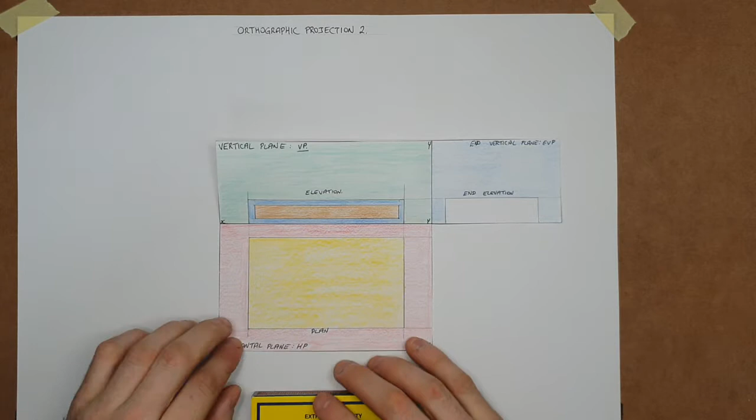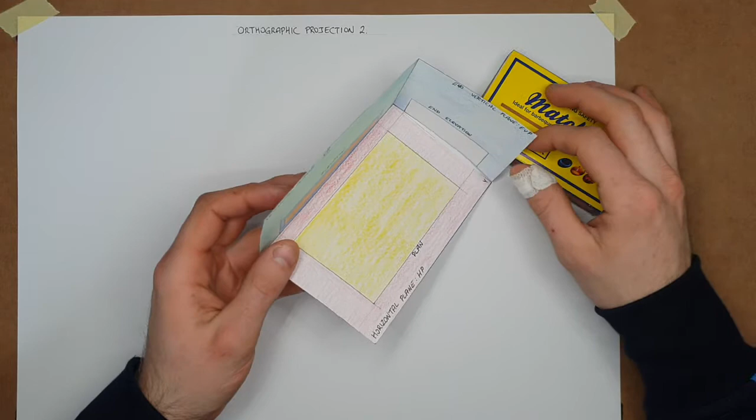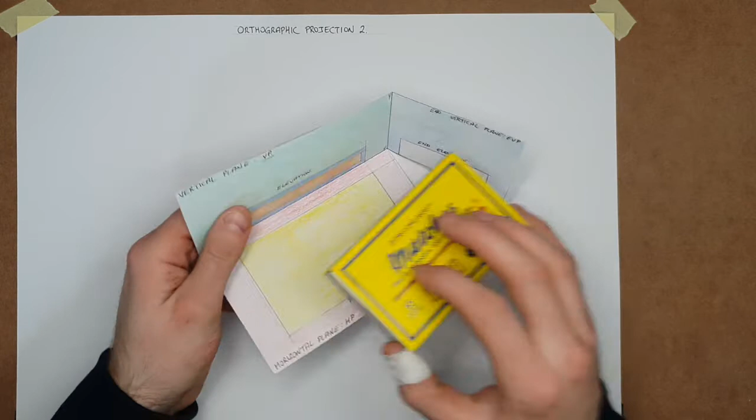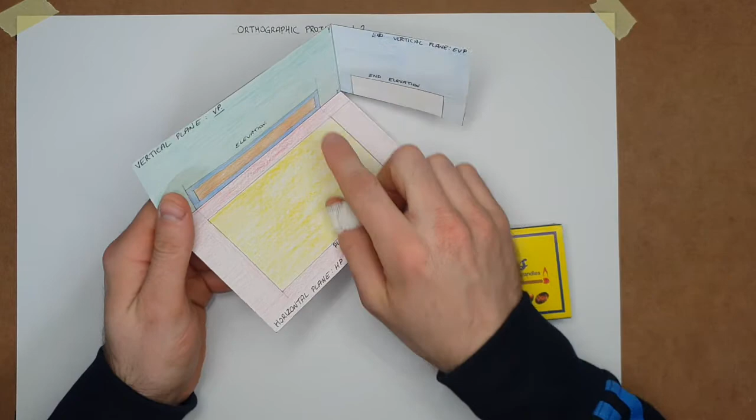Just in revision, when the object is put into the planes, if you look down from the top, the view goes in the bottom. Like with this object, when we looked in from the left, the view was pushed over through the object onto the vertical plane, ending up on the right. So that's the bit of understanding I need to bring forward: if you look down from the top, the view goes in the bottom; if you look in from the left, the view goes in the right; if you looked in from the right, the plane would be needed over on the left.

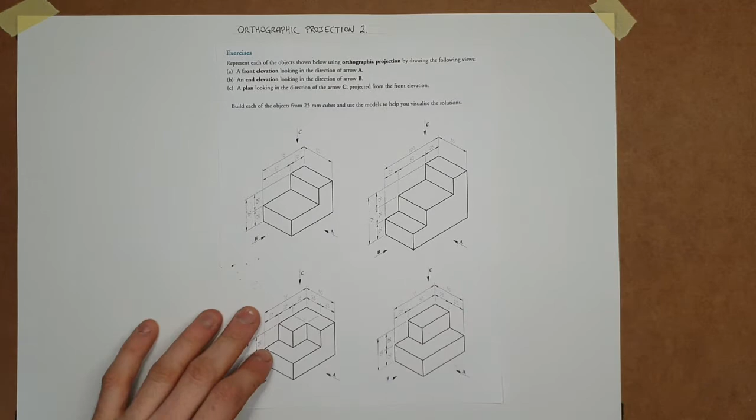We're going to take it on to some more difficult objects now, these ones in particular. Let me zoom in a little so we can see the specific drawing I'm going to do from this sheet - this one here. All the measurements are quite regular. We can see it's 25 and 50, total height and 75. This is an activity that can actually be built up with little bricks.

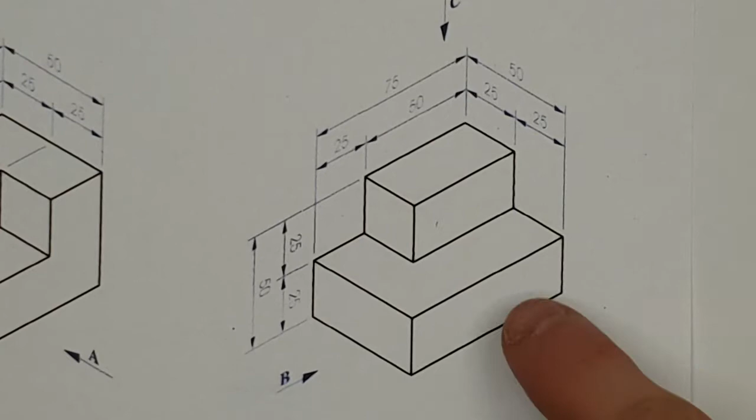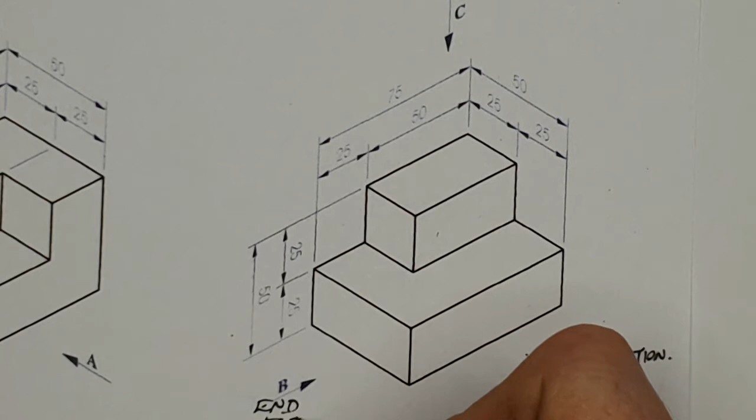What we're looking at is this: we're looking at an elevation A. I'll just take note of that - elevation A. We're looking for end elevation B, and we're looking for a plan C. So three views, all structured on the page.

This time we're not going to draw the three planes - we're not going to put in the vertical, horizontal and end vertical plane because there's no need. We're just going to structure our three views on the page. The best way to start is by adding a little bit of color. If we can visualize ourselves standing there, seeing this, and add color to what can be seen from each location, it makes it so much easier when we go ahead and start drawing after.

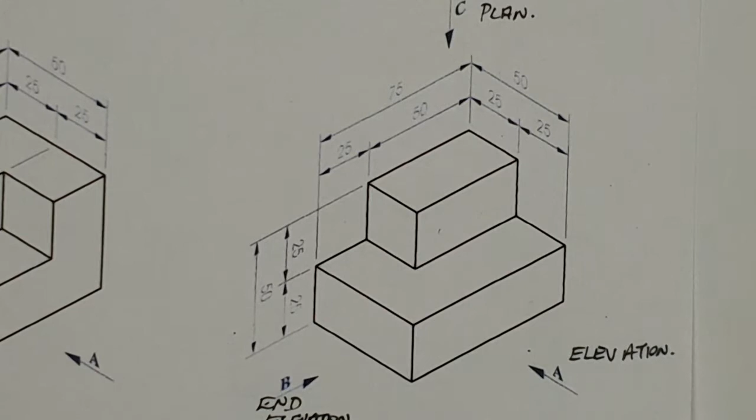I'll zoom out just a small bit, and first off I'm just going to draw a little person here in position A - this is their left hand and this is their right hand. It's very important that we can visualize exactly what's happening, what's on your left and what's on your right when viewing from a particular position.

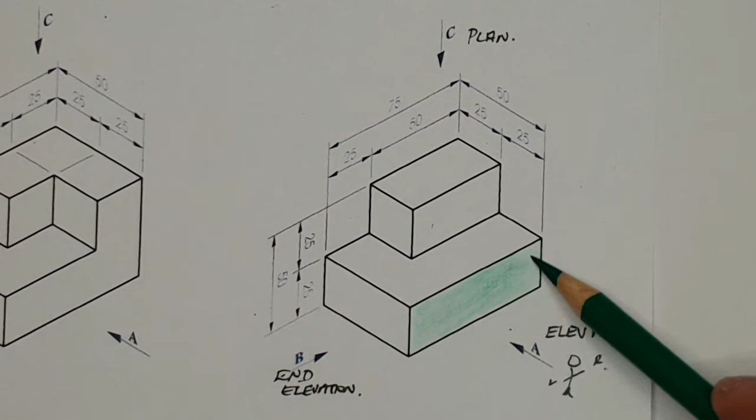As I view this object, the first thing I can see right here in front of me would be this vertical surface, and that vertical surface is 25 millimeters tall. It's the measurement given up to this whole surface, which includes that front. It's 25 tall, and the total length of it, making my way back to the back, the whole length of the object is 75. So 75 long, 25 tall.

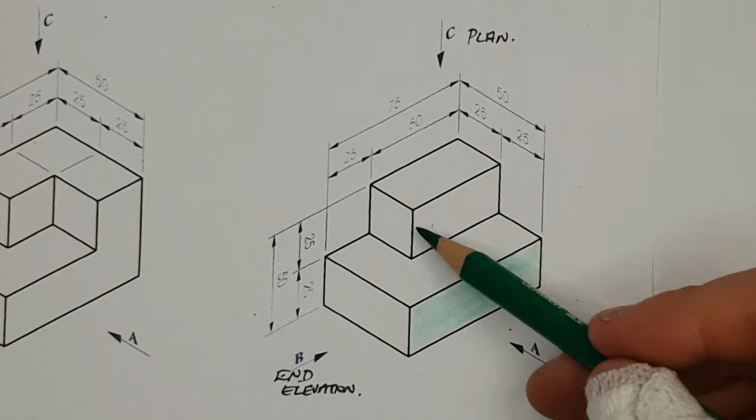What else can I see? I can't see this one - it's in line with my vision, so we can't see it. If I jump up to the top, I can see this one as well. So this one is what? I'll just work back here to figure out my measurements. It's 50 millimeters along this way. And how tall is it? The measurement isn't given out here - it's given over here as 25 again. So there's a bit of practice here in getting used to reading the measurements as well, and what they're pointed at.

Another important thing, though I'm sure everyone's used to seeing this by now. The measurement of 25 here is pointed out using dimension lines and arrows, with a leader line showing that the top of this measurement refers to the top surface, since it's all flat, and the bottom refers to this bottom surface. So the difference in height between the bottom and top surface is 25.

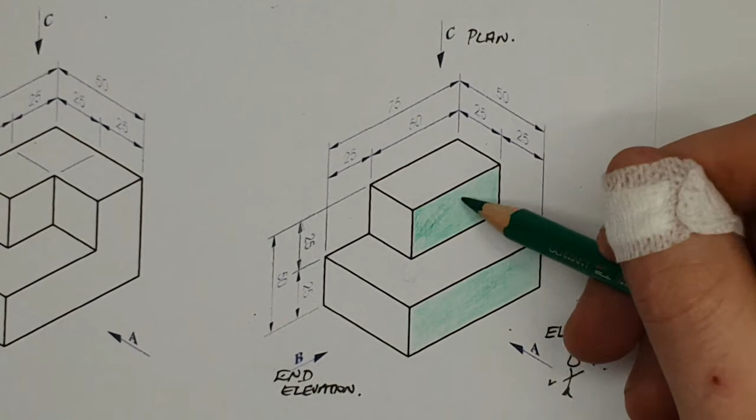From position A, standing here, on my left hand side I get this 75mm line, on my right hand side I get a 25, but I also get another 25 block standing on top. On my left hand side I have a free space here, so I need to think about that - I don't need to add any more colour. That's all I can see from position A.

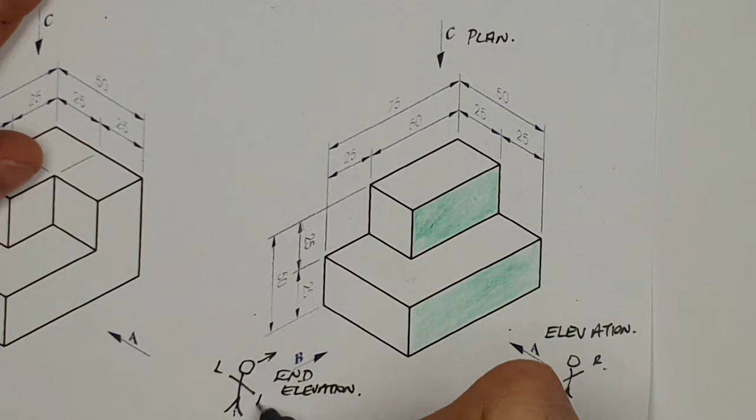If we move ourselves around, taking ourselves from A and walking around to this side, we stand here and look in at the object again. That's my left hand, that's my right hand. So to get the colours again, as I'm looking in, the first thing I can see is this surface here.

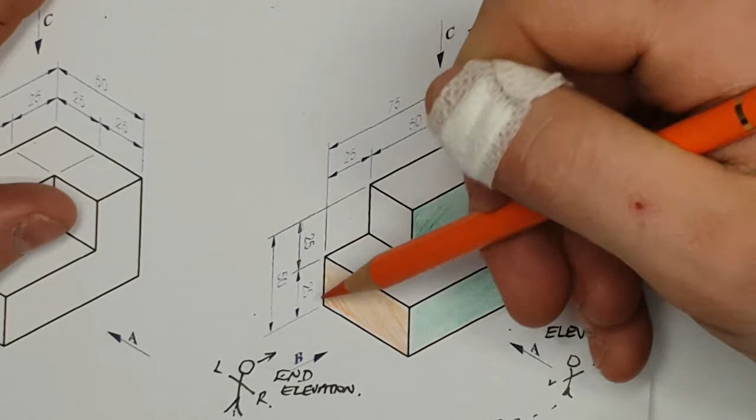Just so I can get familiar again with measurements, that surface is the same height as the green one at the start - both 25mm. Looking at the total length of the object, those are the lengths in green, and this is the widths here, and then we have heights - so lengths, widths, and heights.

The widths are all shown over here. Total width of the object is 50 - 25 for the top block, plus 25 extra, so total 50. What else can we see? Well, on the left hand side, up tall, up high, we can see an extra orange square, just like that. I think that's it - I can't see this flat surface or this flat surface because they are completely level.

So from position B, looking at an end elevation of the object, that's what I can see.

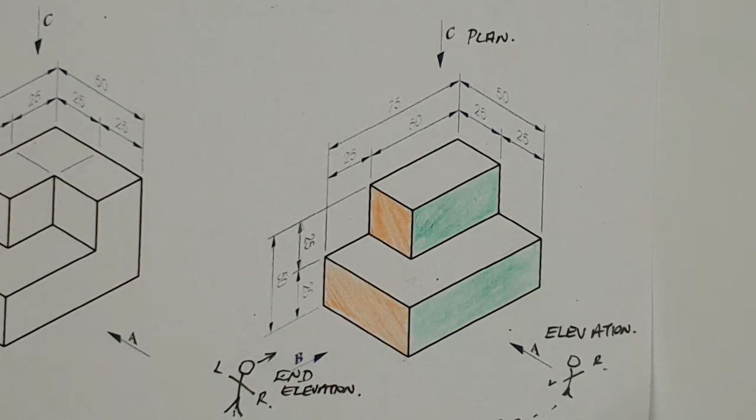On to the next one - this one takes a little more imagination. We're hopping into the helicopter, going up in the air, right up, and looking down on top of the object. So I'll just draw - there's my eye right there, looking down on top, in line with arrow C. So what can I see this time? We'll grab a different colour and add it in, and what we can see is just two surfaces.

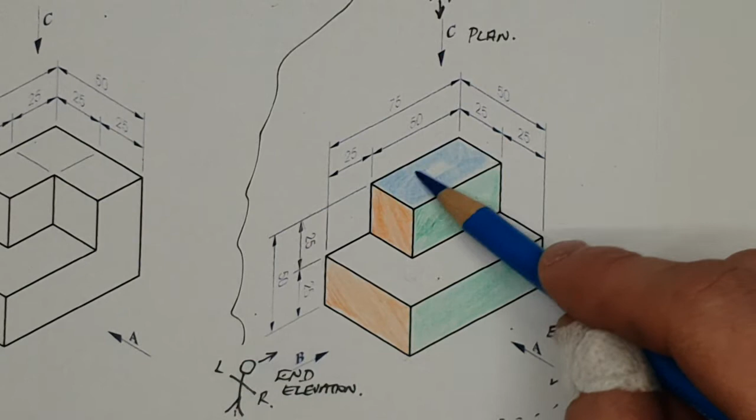I think this is often the easiest one to visualize - whatever is up at the top, like the roof of a building, is what we're looking for here. These flat surfaces up at the top - we have this guy right here, and this time the two dimensions we're seeing are the lengths and widths. We can't see heights when looking down on top at a plan. So we can see that blue surface there as well.

Now the collection and organisation of these three views together - the green view being the elevation, the orange view in from this side, the end elevation, and the blue view down on top being the plan - the collection of those three views is going to give us all the information we need for this three-dimensional object. Now, just fold that sheet in half and leave it to the side of my drawing board so it's still visible, and bring it right down to just that one question we're working on, and we'll start drawing.

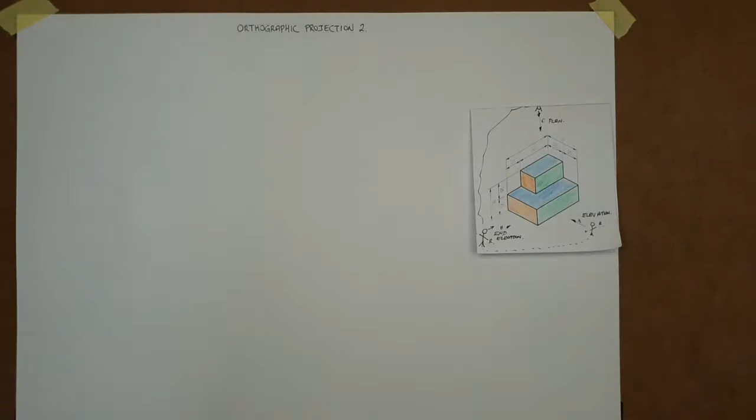First thing I want to make sure is that the drawing fits on my page. I'm going to start off here on the left hand side, and I'll zoom out a bit so that this is all visible. I want to make sure my three views, elevation A, end elevation B, and plan C, all fit on my page, and they will because it's quite a small drawing.

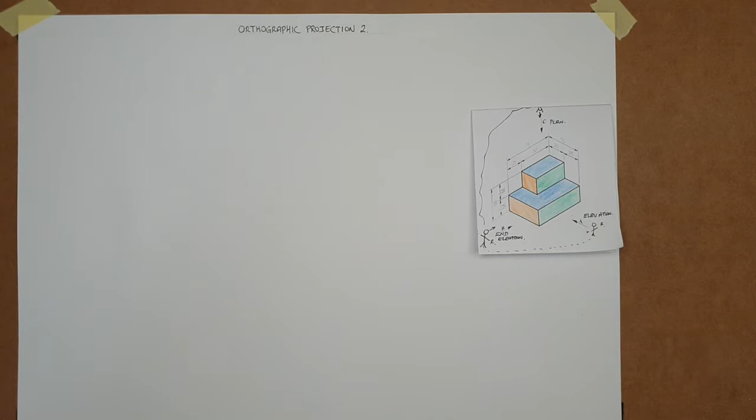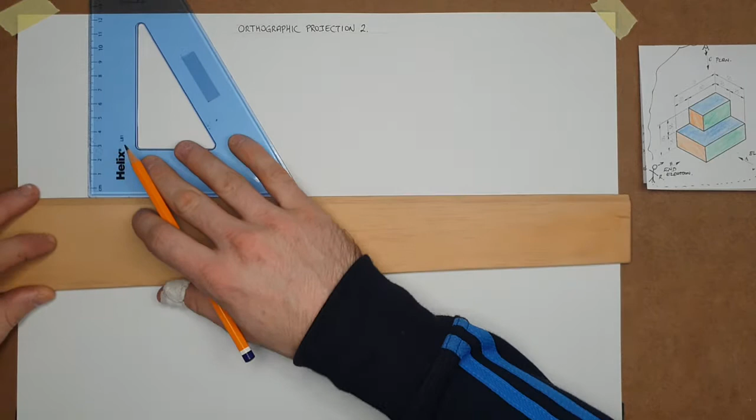Starting point for this drawing: from the top of the page I'm going to come down 80mm. I'm just going to move the page just off the board so my T-square doesn't get caught there. So from the top of my page I'm going to come down 80.

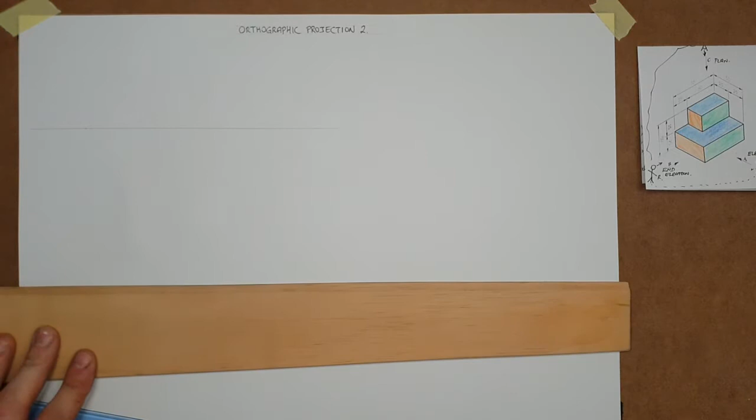And from the left hand side of my page I'm going to measure in 40. That's the start point of my drawing.

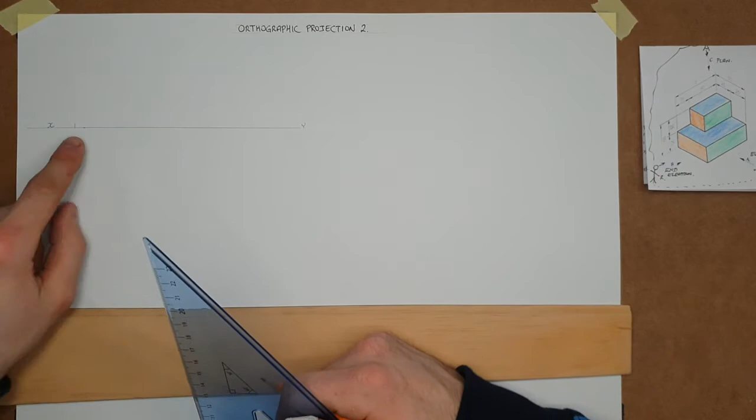The line I just drew, I'm going to try to make sure this stops maybe just about halfway in the page, so I might be able to fit a second drawing in. The line I just drew is the XY line, the line of intersection between the vertical and horizontal planes. The point I just marked, down 80 and in 40, is the starting point of my drawing.

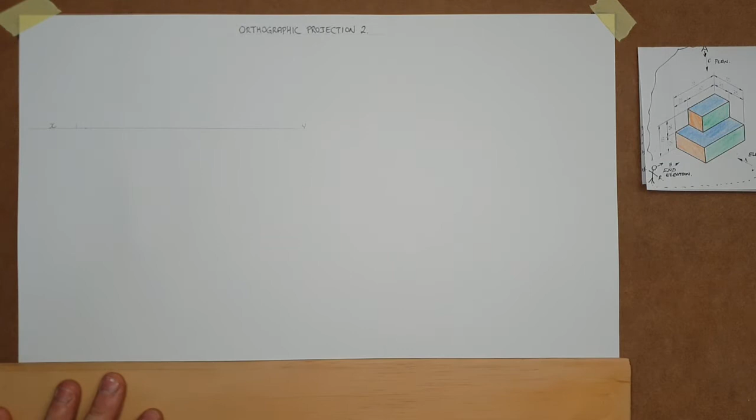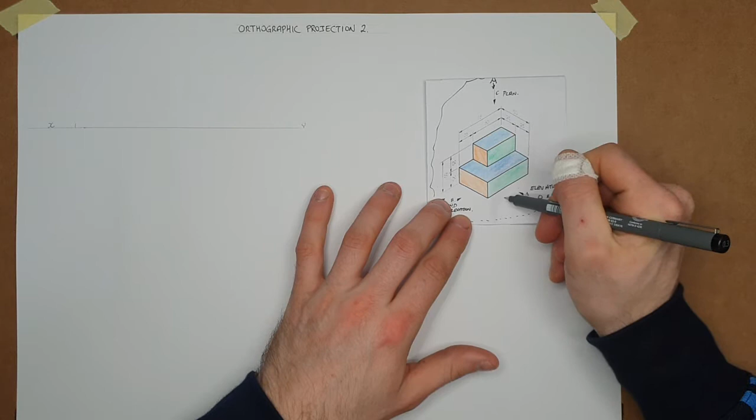It is the first point on the elevation. So where is that? Well, when I'm looking in at my elevation, on my left hand side, down the corner, I have this point right here. That is where I'm going to start. I'll start off by building this first green surface, which is 75 long and 25 high.

So that's where we'll get this question off to a start. I'm going to measure 75 along. I'm going to draw two light lines standing up, and that first surface, as I said, is 25 millimeters high. That's the top of the surface, the bottom of the surface, and the left and right side.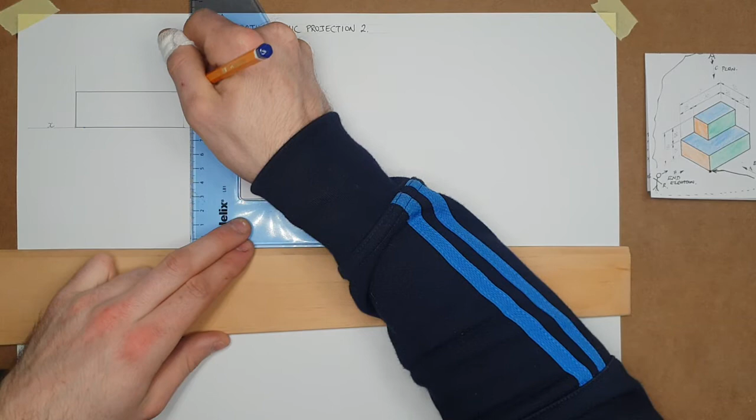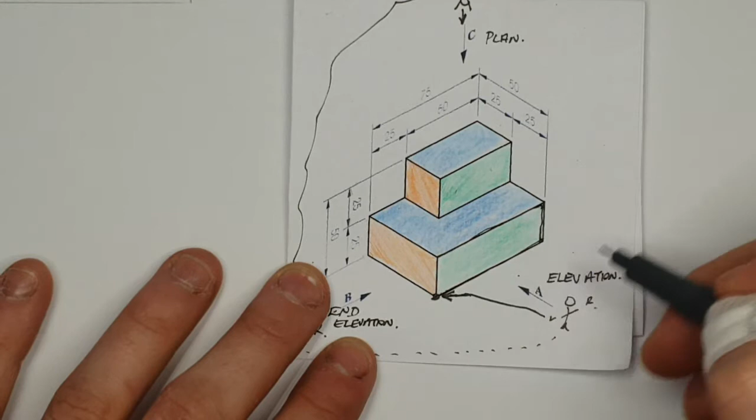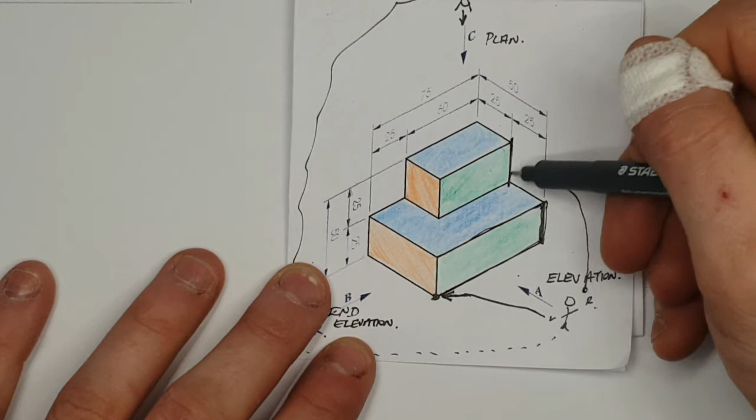Now, one surface done. To bring this back in, what we need to visualize this time is which side is the block. So I've drawn up, gone across, gone back down and across the base. On my right hand side, up top, I can see this block. Now, the interesting thing is that this line and this line are all part of that same back face of the object, the same surface, so they appear as one single straight line.

All of this detail right here is an extra 25 millimeters tall. So I'll build that surface up top again, and from 100 up to 125 is my 25 millimeters extra, and the length of that top surface was 50.

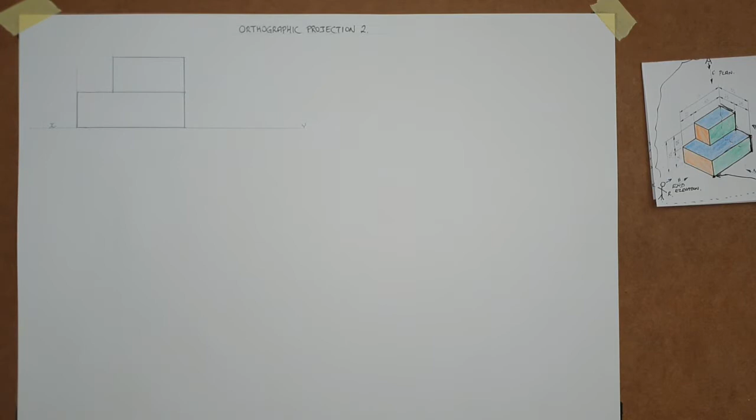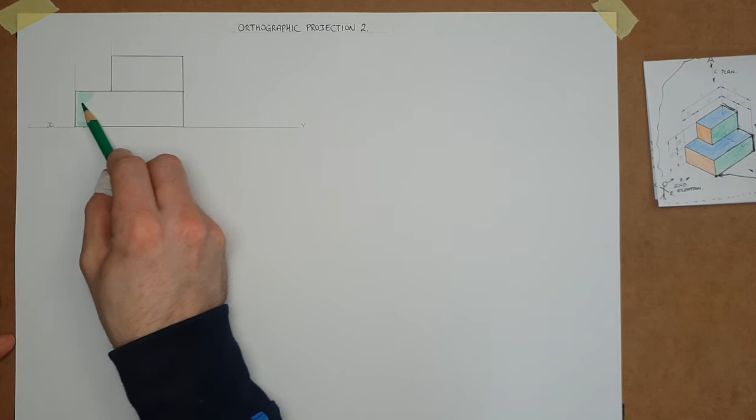Now, first view done, we can take a minute to add in a little bit of colour there as well. I'm just going to add a little bit and finish it after, but you can go ahead and add all the colour now. Pause the video and add in all the colour.

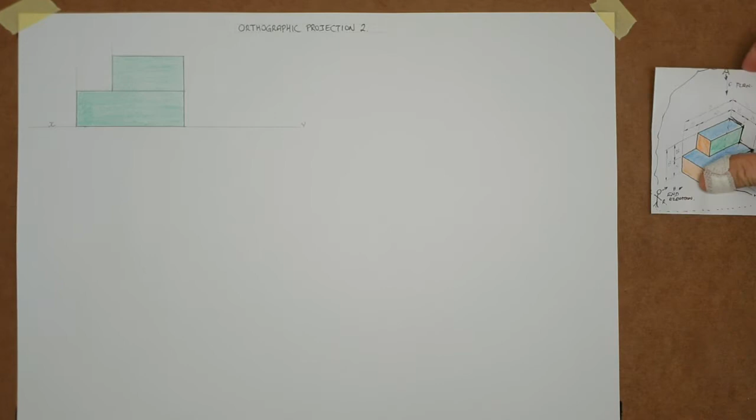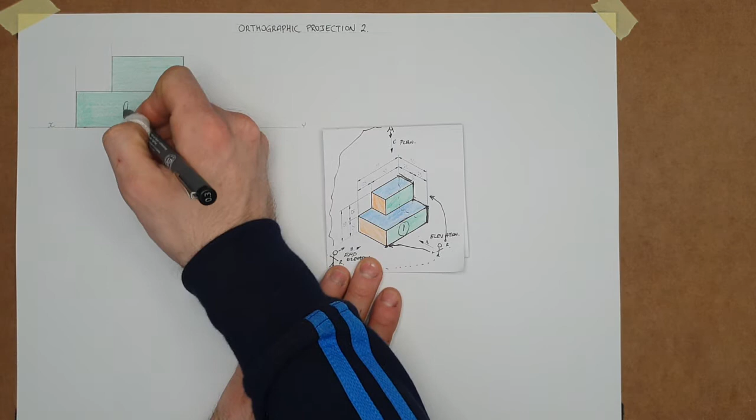So there's the first view complete. View A, looking in this position, we get our first number one surface here down low, and number two, this green surface up top. If I just want to add a note here, this is the elevation. The elevation is the name of the view, and the vertical plane is the name of the plane that it's drawn on.

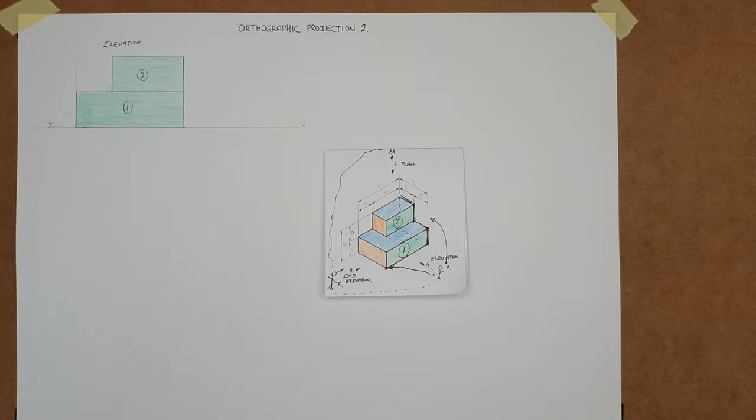Next, last time we worked with our matchbox, we worked from the elevation and down to the plan. So all the lengths marked in the elevation are projected straight down to the plan. That saves us having to measure everything all over again.

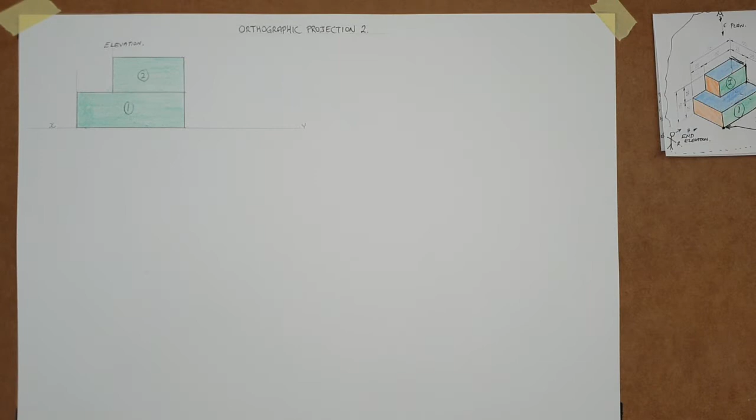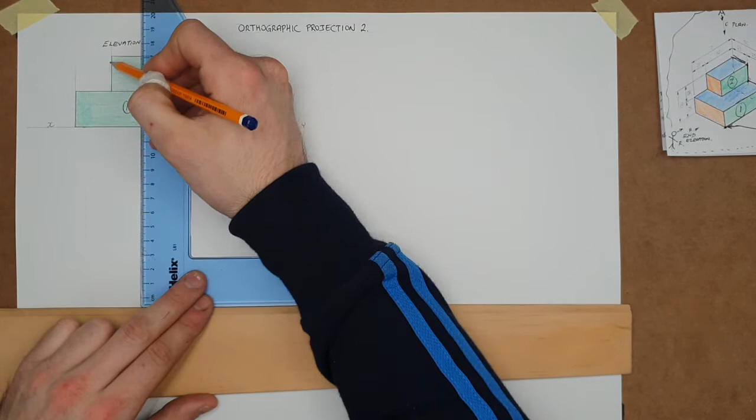The plan in this case is the blue. So looking down from C, the blue detail. If I just put that to the side again, I have all of my lengths marked. So all I'm going to do is take all the positions I've already measured and project them down. I'm also going to take this top position, and this left one. I'm going to leave a space between my views of 10 millimeters today.

What I need to figure out now is what this plan looks like. This is really where the test in visualization comes in. Can you visualize what's happening?

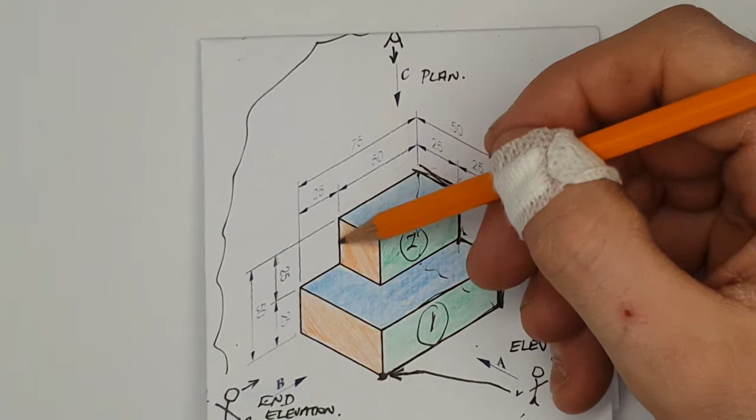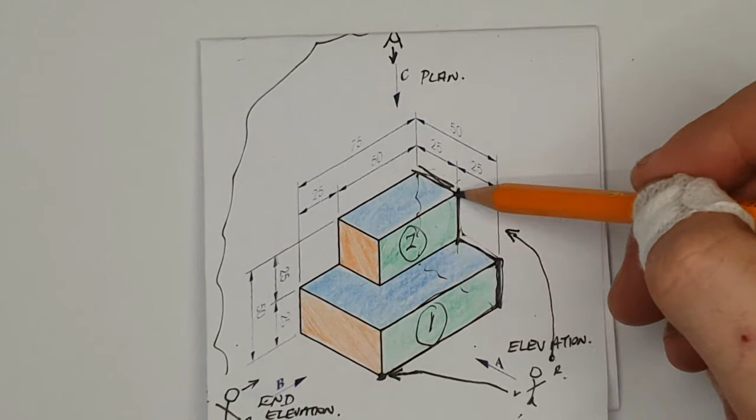First of all, when I'm up here in the air, the whole back of the object, although it does get cut off with a section missing here and here, the back of the object is still perfectly flat. I'll then be able to see this on the right hand side. The object never moves, don't forget, we just move as we're looking at the object from various positions. At the right hand side, I'll be able to see the top surface, 50 long and 25 deep, and then I'll be able to see the remaining surface, which is a total of 50 deep.

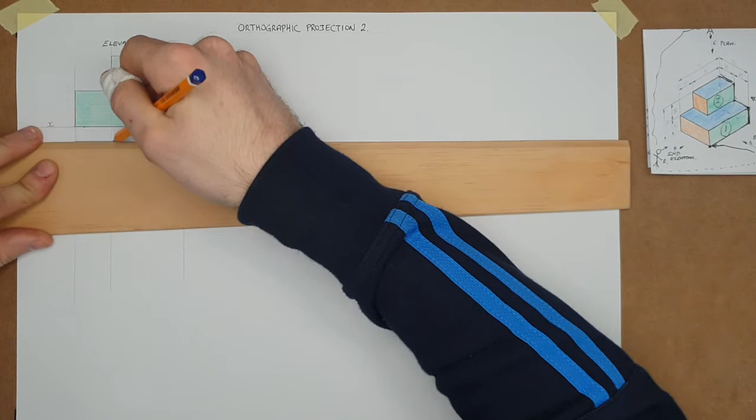So if we just see what that looks like on the drawing: the back surface of the object, one full solid line.

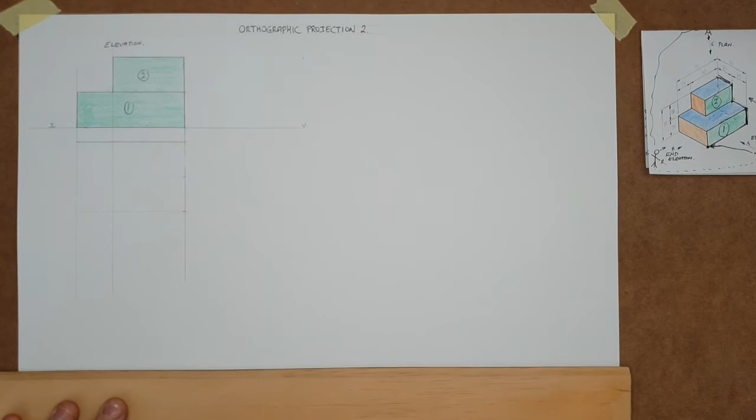I know that the two depths that are given are, sorry, I marked 15 by mistake, 25 and 50. So there's a 25 given and a 50 given. I'm going to just add them both in light first of all. There's the 25, there's the 50. Now I need to figure out where the division is between my two surfaces.

Before I do that, I can outline the whole object, because I know the front of the object is fully solid, the left side of the object is fully solid, and the same here on the right. So the object is outlined.

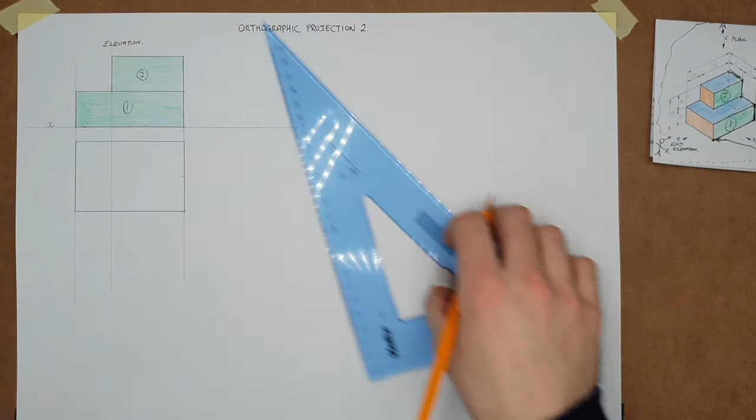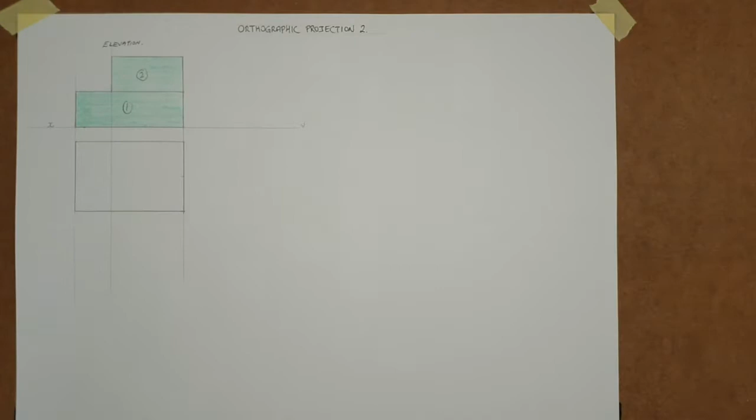Now what I'm working on is this: I'm looking for the outline of the top surface. It's on my right hand side as it was in the elevation, and it's 25 mil down, and then I can outline that. So on the right hand side, 25 mil down gives me the outline of that blue top surface here and here.

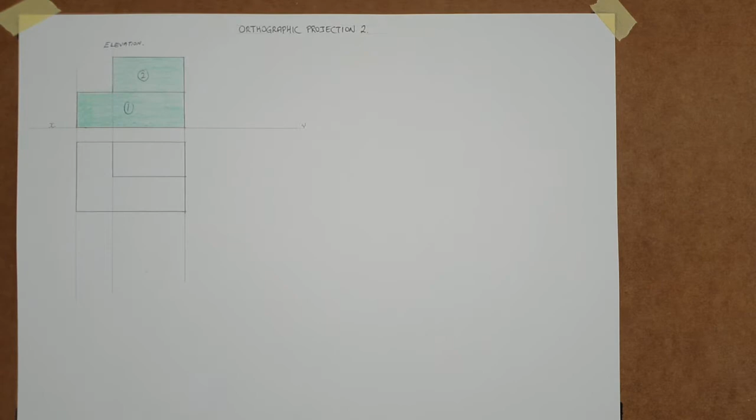So once again, we'll add a little bit of colour. I'll pause the video, go ahead and add the colour, and then we'll number our surfaces and reference that to our little three-dimensional drawing, and we'll take it from there.

Now there's the blue colour added onto the top surfaces. If we wanted to number this - and the only purpose of this numbering is just to help with understanding and visualising everything at these initial drawings - I might call this very top surface, surface number 3, which is here.

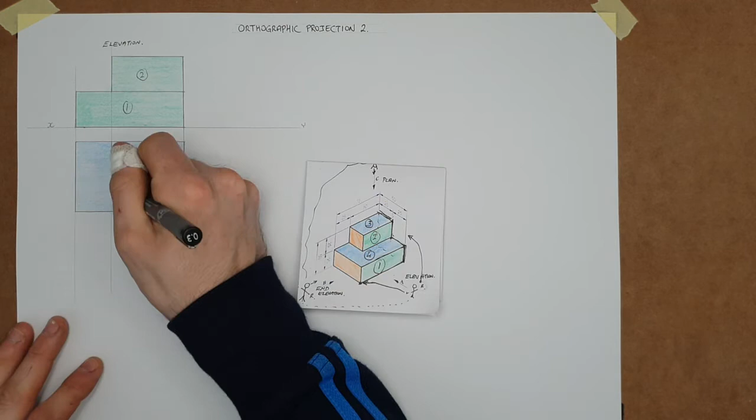And the next one down is kind of an L-shaped one here, I'll call that surface number 4. As I said, this numbering is not going to be necessary in future - this is just to get used to the original drawings.

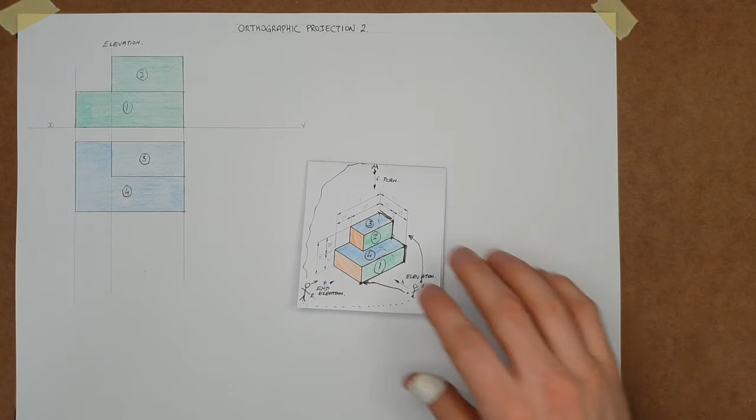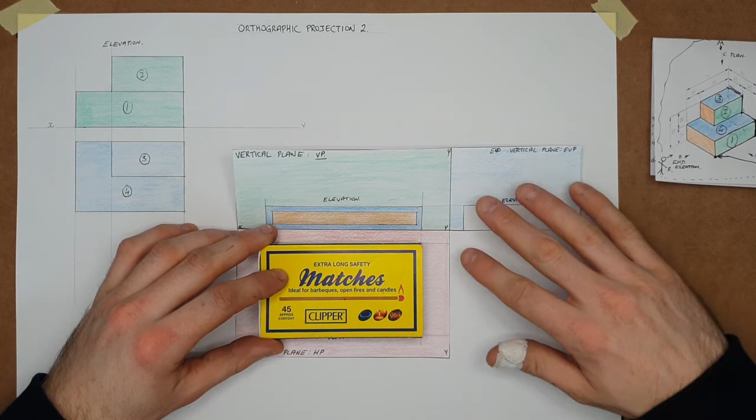Now we're going to change things up just a little bit. In the last video, we left a bit of space - we had our XY line and our YY line, but the object, the box of matches, was sitting on the ground with a bit of space left here. This time we're going to move the planes over until the object is touching the YY line, and that's going to save us a little bit of work, as we'll see in a second. So the object is touching the YY line.

Now what does that mean for us? It means that right there is the YY line. Last time, this is what we did, and we'll still do the same first step - that's not going to change.

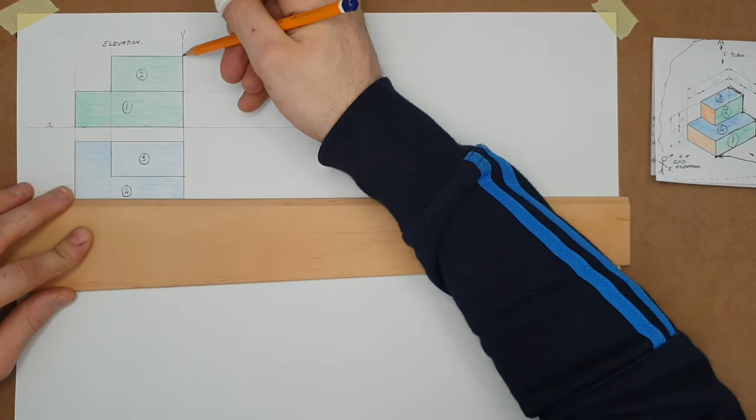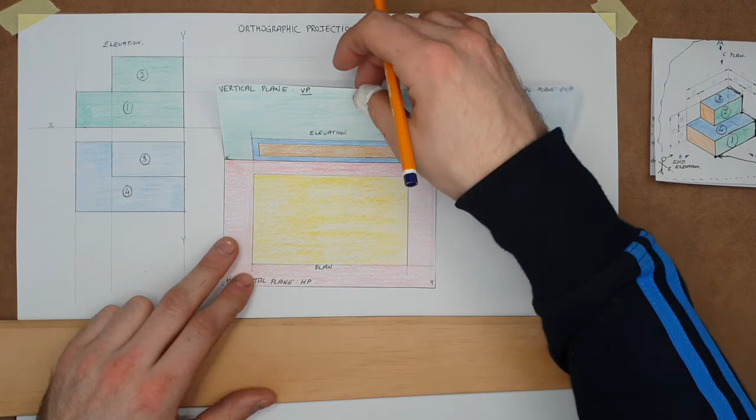We don't want to have to measure the 25 mil height again, or the 50 mil height again, so we project them straight across the page, just like the previous time. But the difference is this: in the previous example, with the object sitting on the ground, we projected along, hit the YY, then went up at an angle to hit the YY again. This time we're already hitting the YY line, so there's no need to project along - it just saves us a bit of time.

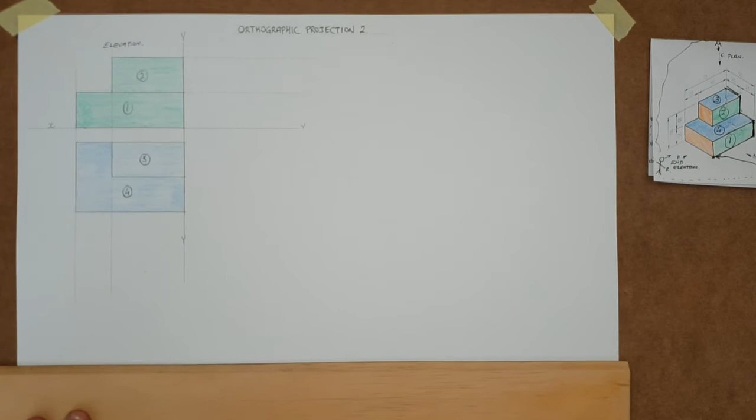What I didn't mention in the previous video, at the very beginning, is a way to project all of our distances. So we had a 10, a 25, and a 25 - we can actually use the compass. The compass shows us the fold out, it shows us this movement actually happening on paper.

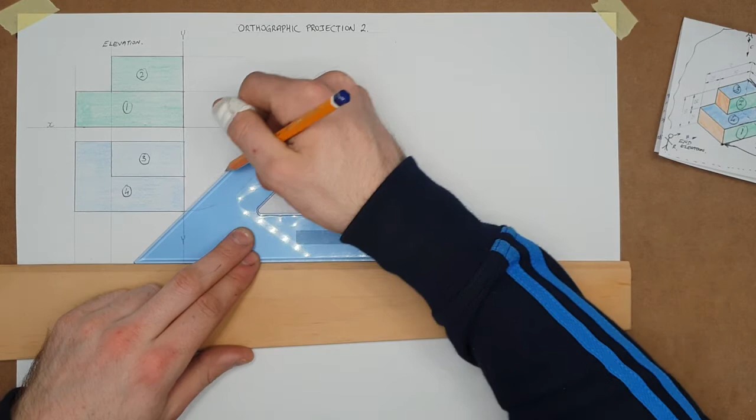But as I said in the previous video, the more accurate and faster way is probably to just take your 45-degree set square and project it up. Either way, you end up at the exact same point.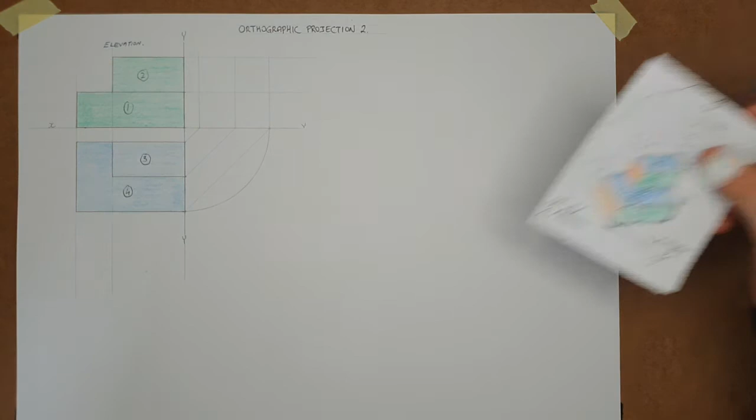Follow the same process for the two other points. From the points that land on the XY line, it's going to give us 1, 2, 3 projections. Okay, let's focus back in on our question now, so we can get an idea of what's happening here.

We're now, after moving ourselves into this position - we were at A, we actually skipped B, went up and projected our plan. Usually we draw the elevation first, the plan second, and the end elevation third. That's our usual way of doing it.

We are now standing right here in this position. Everything we can see is orange. We cannot see the green, we cannot see the blue. So it's just the orange detail this time.

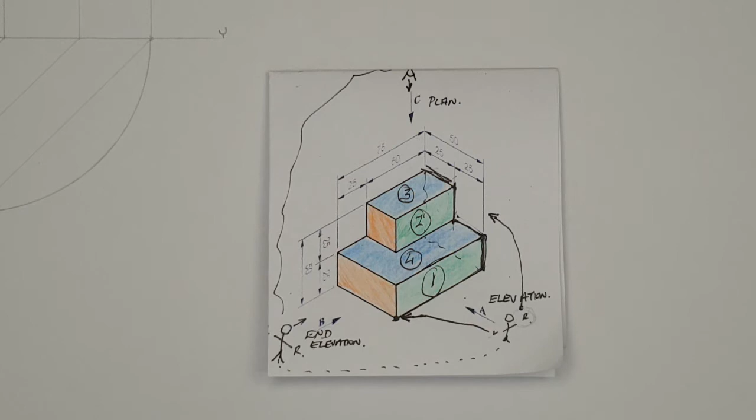The first surface we can see right here in front of us, and we've already used numbers 1, 2, 3 and 4, I'm going to call number 5 and then number 6. Number 5 is 50 wide - because we have lengths here with our heights and these are widths - and it's 25 high. Number 6 is 25 wide, because there's the measurement given to me, 25 wide and 25 high.

But the good news is I don't have to measure anything. All my measuring is done for me. I did it in my last 2 views, so I won't do it again.

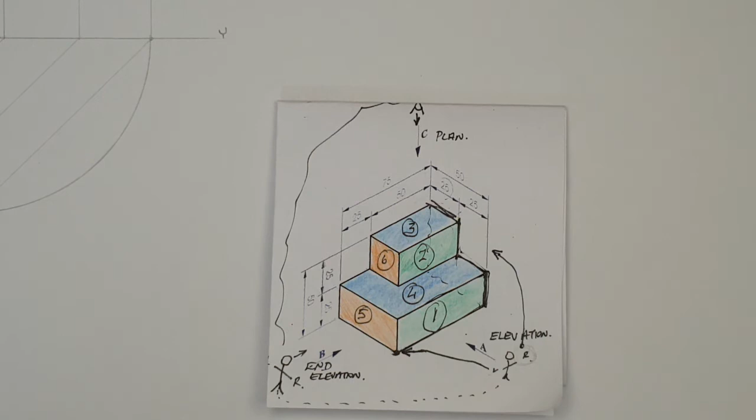The only thing we do have to realise is that number 6 is on the left. The most common mistake made at this point is putting number 6, this top surface, at the wrong side. Let's just have a look back in at our main drawing.

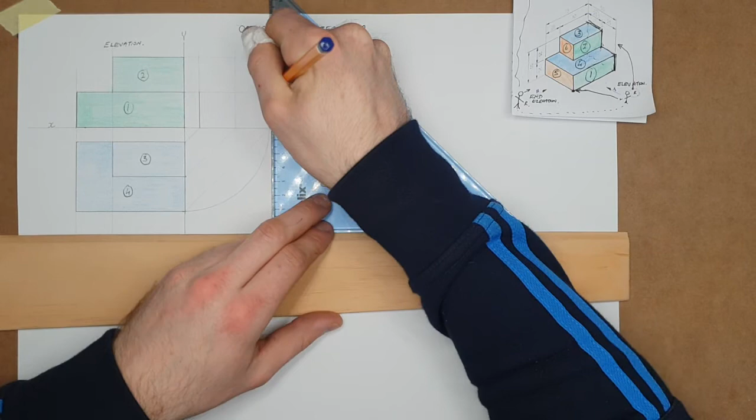Let's get the H pencil because we should be ready now to start heaving in some detail. Number 5, this main orange surface, is here. When I was looking at number 1, number 5 is there. I project across - it's all the full width of it here, so I can draw that one in. So right there, that is surface number 5.

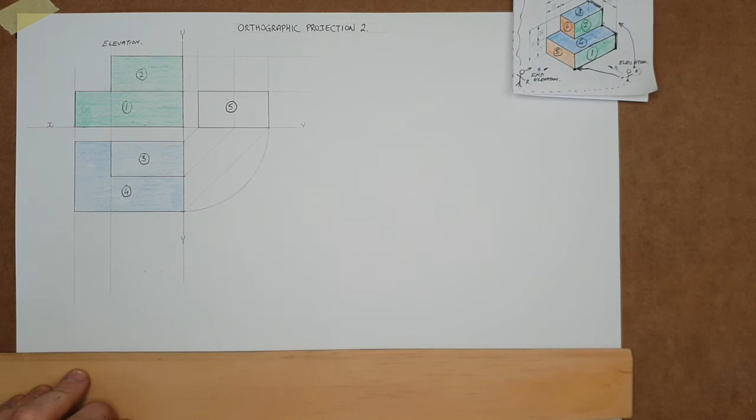Now, as I said just a moment ago, the mistake I'll see very often here is that someone forgets about their lefts and rights and puts number 6 up here in this corner. It's not possible. If we look at the elevation, that right along there is an edge view of number 6. We know it starts at this height and finishes at this height, which is fine - it could be either of the two, but we work down to our plan. There it is. If you project across and up, this has to be here. There's no other place for it. So number 6 has to be right there.

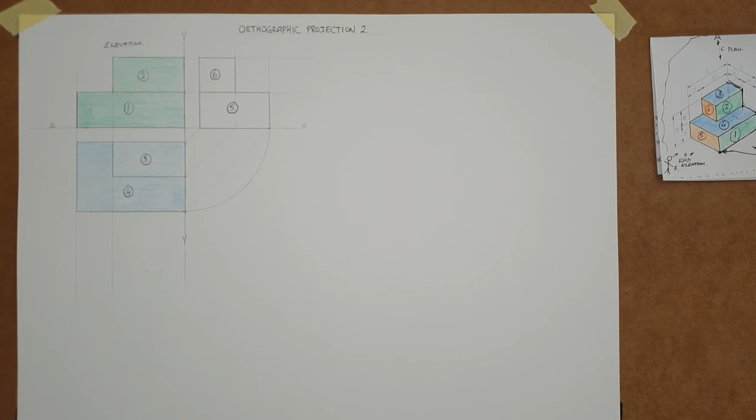Now, once again, I'm going to just quickly pause the video, get this shape coloured in with the orange, just to reference my 3D, and then we'll have one final look at the drawing before we finish up.

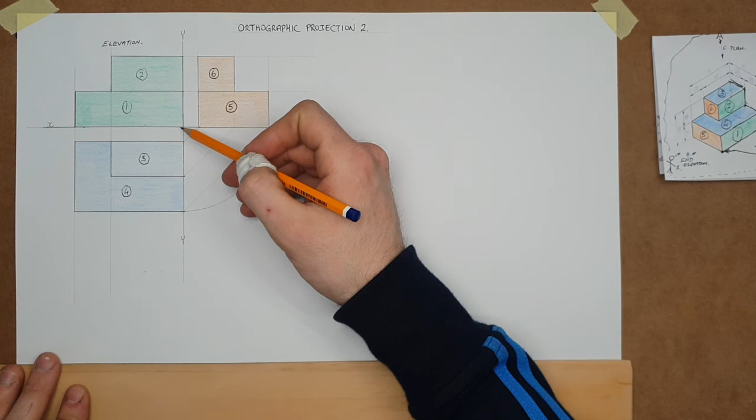So what we can see here now is the complete drawing. I'm going to just add in that little bit of weight onto the XY line that goes across our drawing, including this point, our XY line going across, and in this particular case we put the object up against the right wall. We took it right in up against the vertical plane, so that's our Y line all the way down.

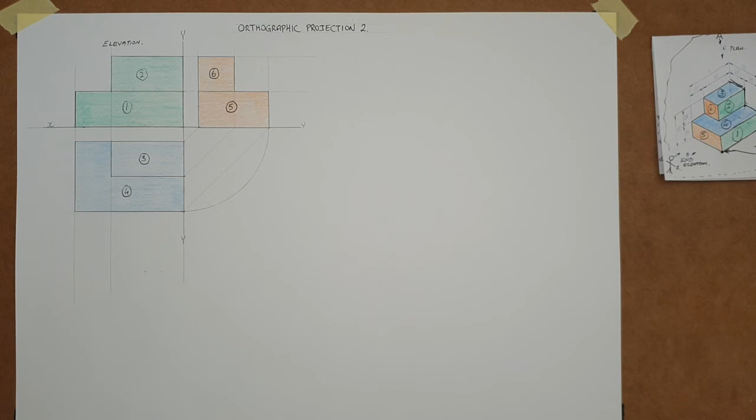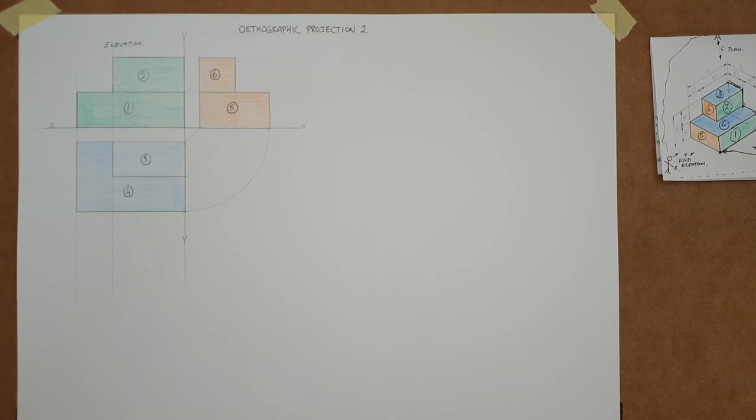We have now seen why it's important to be able to visualize what's happening, to see what's on your left, what's on your right. We've also seen how different arrangements of objects can be seen in our views. There's more practice questions to do at this stage, and the next question is just going to up the level and up the difficulty just that little bit.